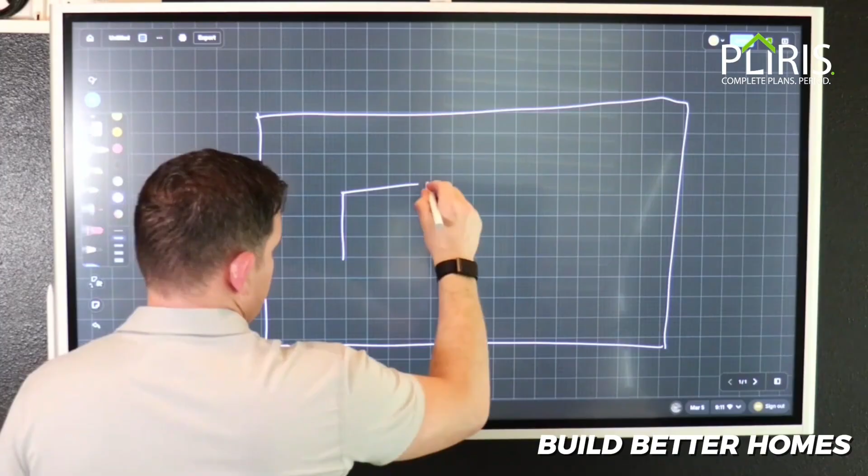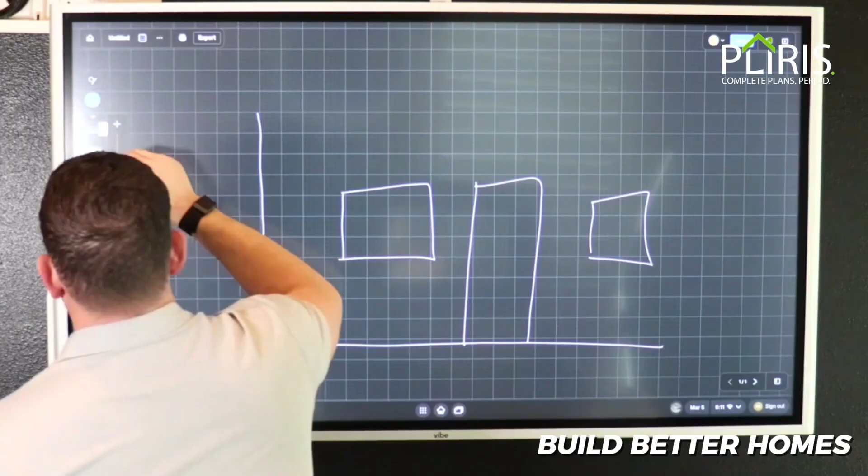A segmented shear wall considers a full height, unobstructed, with no penetration, so no windows, no doors, section of wall. Okay. So if I have a wall, and let's say just a common kind of front entry wall, I've got a window here, I've got a door here, and I've got a window on the other side. And I'm actually going to make this wall a little bigger to account for that. So the code is very simple in this. A segmented shear wall is a section of wall that has no penetrations in it that's also full height.

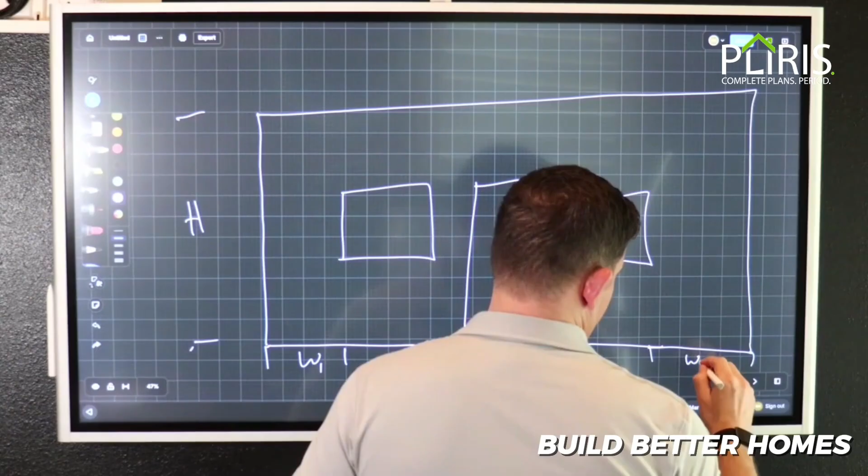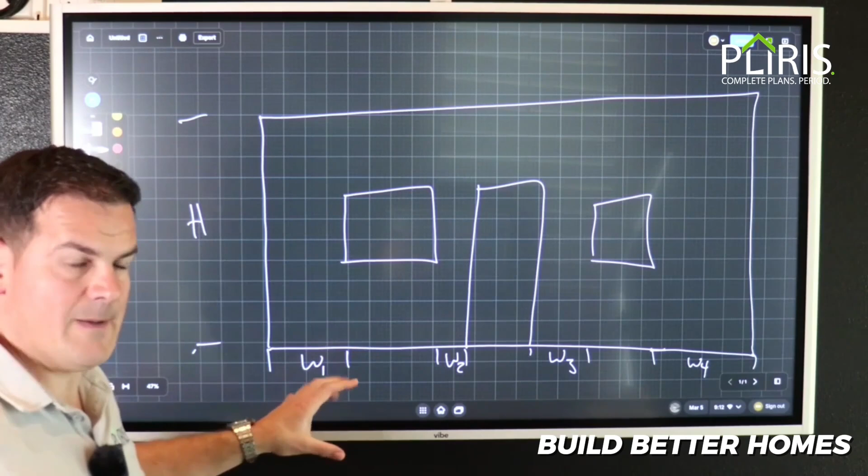So then there's also what are called height width ratios. So if I have my height here and say I've got this window width here and this is unobstructed. So this is 1, this is 2, I've got a width here. This is 3, and this is 4. So the height to width ratio is very simple. It's across the board. It's 2. No caveats, no reductions, no nothing. It's 2, which means very simply, if I have an 8-foot tall wall, I need a minimum 4-foot wide panel. And then I can take the complete shear of that in a segmented system.

But there's an exception to that, which says if I am over that ratio, I can still use that section of wall, but I have to take a reduction, which means that I can then go all the way up to a 3.5 ratio. So if I had a 9-foot tall wall, I can have less than a 3-foot wide section. I think it's 2'8" is what it works out to be. A 2'8" section on a 9-foot tall wall. And I can still use that section as a segmented shear wall, but I have to take reductions to its capacity because it's considered what's called a narrow shear wall.

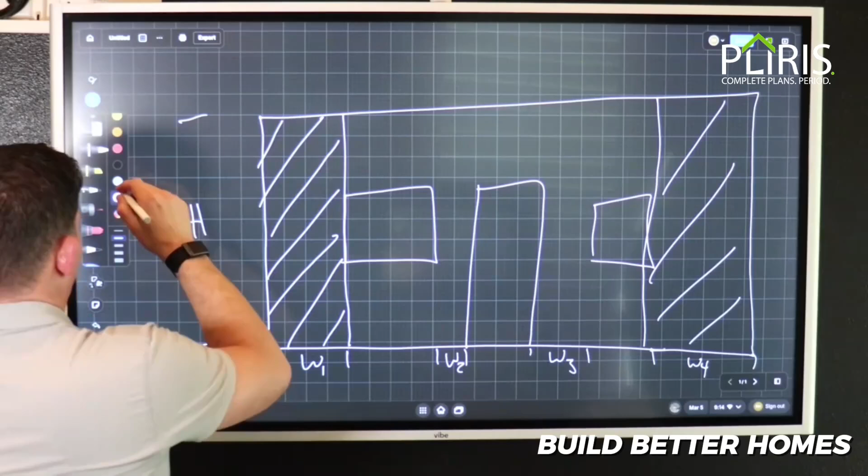But still, let's say my W2 and my W3 don't meet that ratio. So my section between the window and the door on both sides don't meet that ratio. That means all I can do is use this segment here, and then W4, the section on the right side of the window, I can use this segment here. Now, both of these are going to wind up with hold downs. So I'm going to have a hold down on both sides of this segment, and a hold down on both sides of this segment.

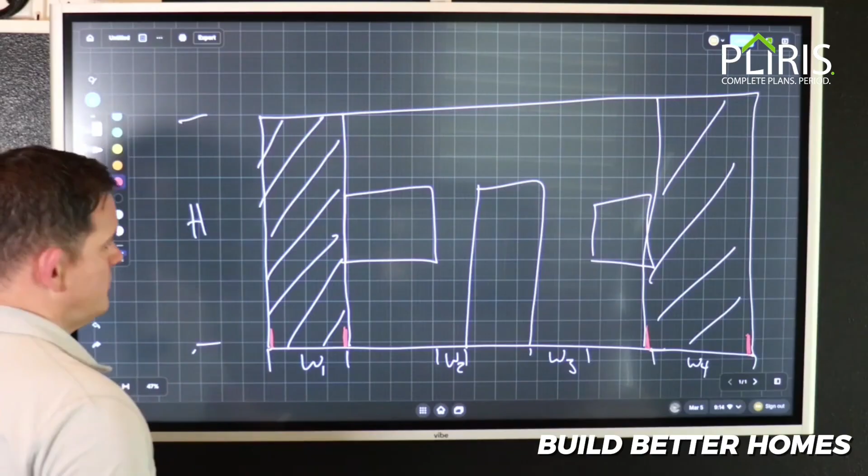What has happened now is I basically only have 2 segments of the wall that are usable as a shear wall. And each of those are acting independently. So I have to account for this situation of hold downs on either side. So I wind up with 4 hold downs on this wall section. Okay. That's segmented.

Now we're going to draw basically the same situation here, in which I have a standard entry wall. I've got a window. I've got a door. I've got another window. Keep making that one way too narrow, don't I? All right. So now we look at this, and I'm actually going to draw these windows a little differently.

So now we can look at this and go, okay, well, I have these windows and I have sections of wall above and below the window and adjacent to both sides of the window. Why can't I use those? And the fact of the matter is you can use those for lateral resistance. And that takes us from a segmented shear wall assembly to what's called a perforated shear wall assembly.

And so what a perforated shear wall assembly does is basically say, hey, you've got this penetration through the wall that takes away some of the shear capacity of this wall, but it doesn't make it zero. So why not just reduce it by a factor based on the ratio of that window opening to the actual area of the wall, or even the area of the door.

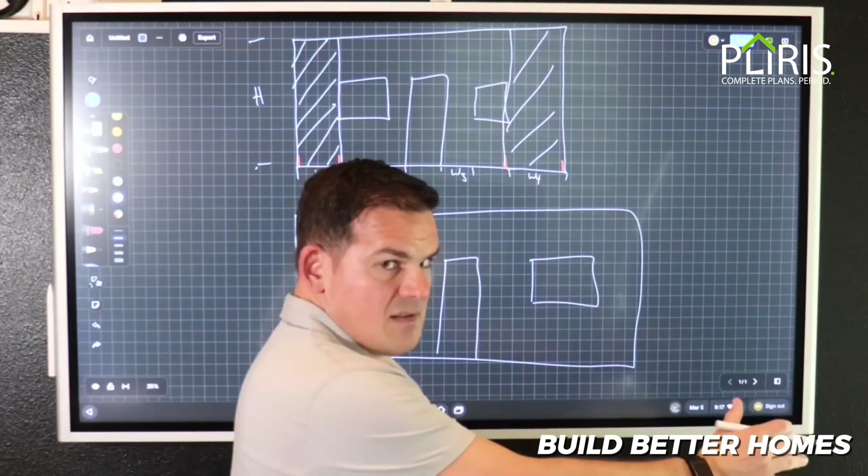So that's called a C0 factor, and it's a reduction factor that we account for. There are still limitations that we have to look at for the ratios, but we can say, hey, I've got a window, I've got a door, I've got this thing fully sheathed. This whole wall is fully sheathed. So what it allows us to do is say, okay, well, I may be able to resolve the load just here, just on one side of the door, and so I'm just encompassing a window, or if I needed the entire wall, I can account for the reduction factors for all of the openings as a relative ratio to the overall area of the wall. So now my shear wall becomes everything that I've sheathed. So it becomes all of this.

And so now, in the case of a lot of states where we already fully sheathe our walls to properly account for the siding and provide backing for the siding, we can now account for all that sheathing using a perforated shear wall. Now, I will say we work in states where stucco is very common and the builders are trying to save on plywood. And so we do what's called selective sheathing.

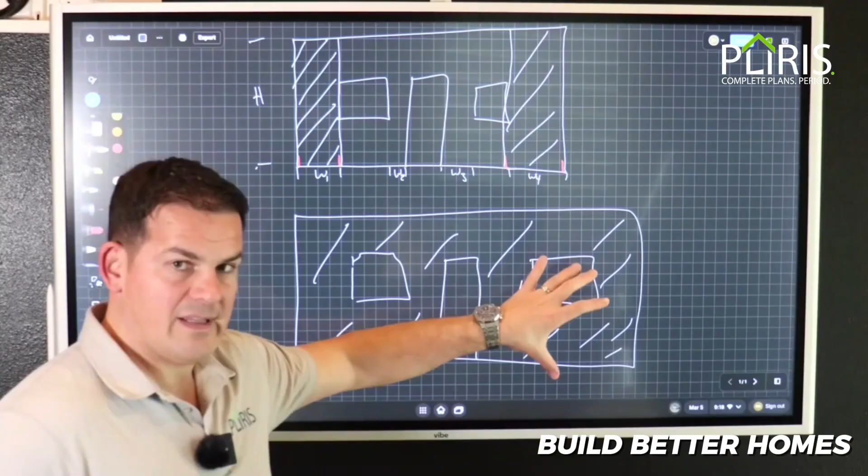And so in this case, we may look at this and go, well, hey, I don't need this whole wall sheathed in order to resolve the load. I can just, from the corner to say the door, sheathe that section. And then the rest of the area gets a fiber type board material that they put on instead of the more expensive plywood material. So then we would just be looking at sheathing this smaller section, resolving the load, even though we have a window, and then the rest of it can be the fiberboard. But regardless of what we wind up with, we can still account for the fact that we're putting in sheathing and we have some windows, but there's sheathing above and below it.

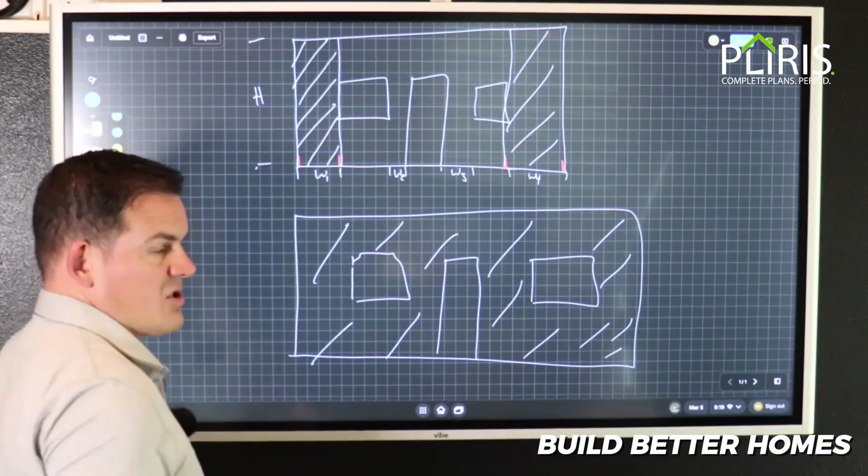And then what winds up happening is if we do that, instead of say the upper section where we've got multiple segmented shear walls, where each segmented shear wall has a hold down on either end, we now can wind up with just a hold down at the very end. So we just went from 4 hold downs to 2, which is great. Okay. So this is segmented. The upper one again is segmented.

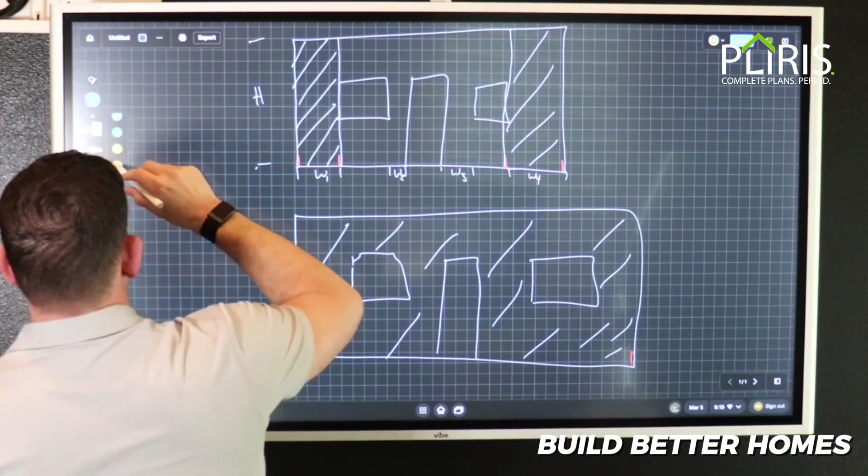Again, I'm learning my whiteboard. So appreciate your patience as I learn how to use this really cool tool. And I hope it's beneficial.

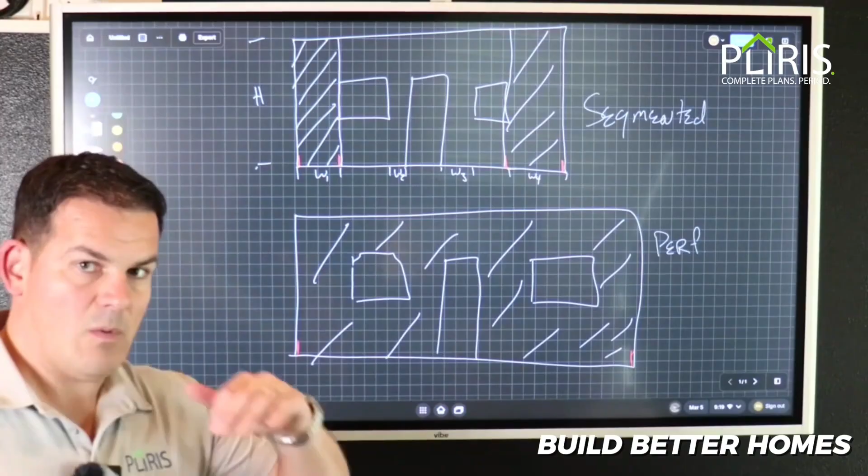So this is segmented. This is perforated. We'll just abbreviate that. Okay. Now there is a third prescriptive shear wall that we can engineer with. And I'll go back to what I mean by prescriptive. So there's a third prescriptive shear wall that we can use. And that third prescriptive shear wall is what's called a force transfer around opening, or FTAO.

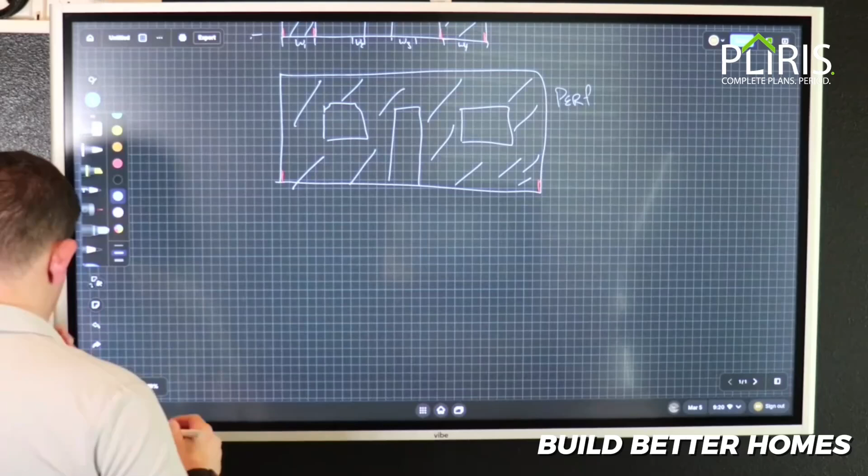So where this comes into the discussion is, let's say we have a wall. We've got windows and a door. We got another window. But you'll see I've drawn these windows pretty large. So the segments adjacent to them are pretty small. And I did this for a reason, because this also becomes common in a front entry condition, or in an area where now we're seeing jurisdictions actually requiring a percentage of openings based on the front of the building. They're pushing for more window openings to increase the aesthetic, not just be a four-sided box with just a small front window, an egress window in each bedroom, and a window in the bathrooms. They're trying to encourage the use of more openings.

So what we wind up with, unfortunately, these segments may be too narrow to meet the ratio. So that 2 or 3.5 ratio, we just can't get to it. And so this is a great tool that we use in that situation. We also use it when the forces are so high on a wall that it's pushing us into a hold down that is either A, significantly more expensive, or B, cannot be retrofitted.

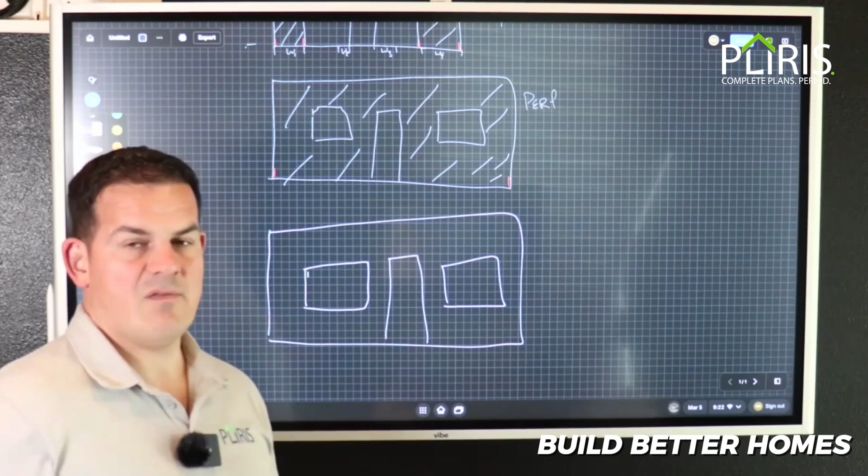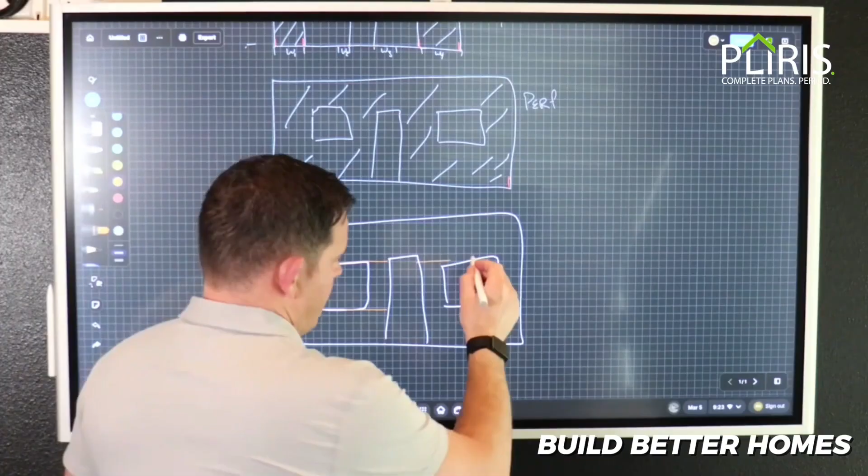Okay. So again, ratios or just the tension forces are so high. And so what an FTAO is, and you've probably seen it driving around job sites, especially on multi-story apartment complexes, we actually put a strap across the top and the bottom of the window. Okay. We have this strap going across it, and that functions as a drag or a collector.

So for the typical wall, the top plate and the bottom plate function as that, just under natural construction conditions. But what we found through testing and the development of this is by putting that strapping and providing blocking in the back, it serves the same purpose.

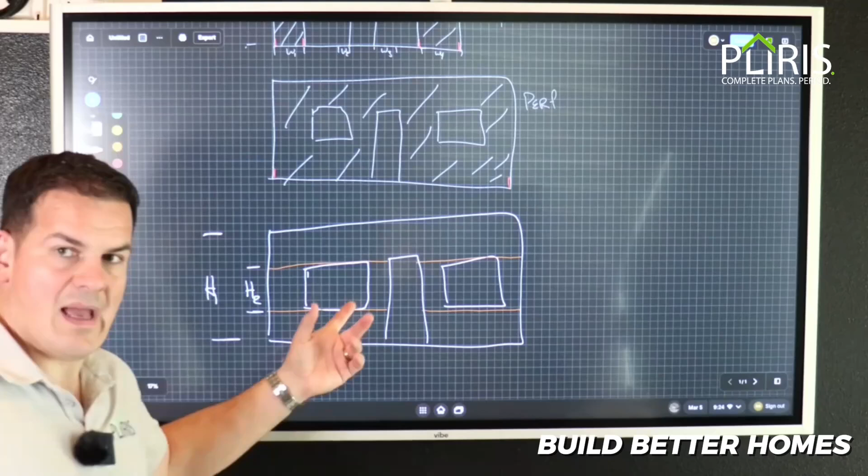And so now what winds up happening is, instead of having to take the full height of the wall in consideration for our ratio, we actually take the height between the straps, which is basically just the height of the window. So now, let's say I've got a 9-foot wall and I put in a 5-foot tall window. Now for me to meet that ratio, my height that I'm considering is now 5 feet instead of 9 feet. So for me to meet that 2 or 3.5 ratio, I can do that with a much narrower wall section.

Okay. And so by doing this, it does a few things. So one, it brings our height down in our ratio, which is great, because let's say we were at 3.5. Now I put those straps in and say it gets me under that 2 ratio. Now I don't have to take any reductions on my shear wall.

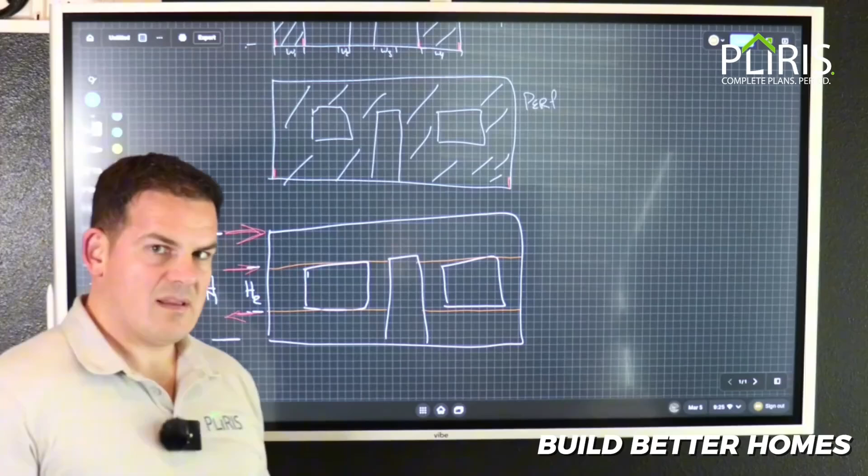Okay. It also shrinks my height down that I have to account for in the tension, what's called the tension compression couple. So if I have my forces being pushed up here initially at the top plate, I now can actually account for them pushing right here at my strap, because this is now functioning as a collector. Okay. And then I'm actually looking at them being resolved based on the height of my window, not the height of my wall.

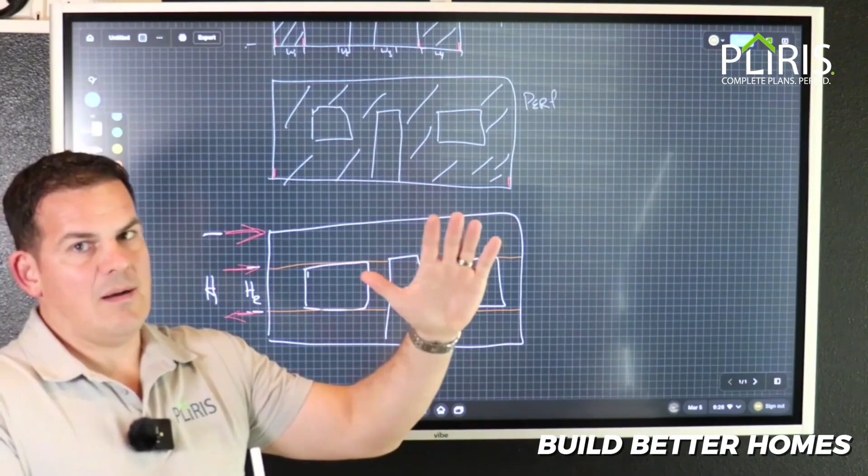So in doing that, it also reduces the tension force that's on there, because when I'm pushing on something taller, and we can think of this as the leverage equation, right? A consideration of leverage. If I'm pushing on something, let's say a box, and I'm able to get way, way high up on that box, it takes less force for me to push that box over.

If I'm pushing at the top of a box and I'm trying to resist it at the bottom with a point, okay, the further away I get from that point, the more leverage I have. So the more force that base connection requires in order to resist that load, okay? So if I'm going like this, the higher up that force is, the more resistance I need on this side. If the force is pushing way up here, the more resistance I need on this side, okay?

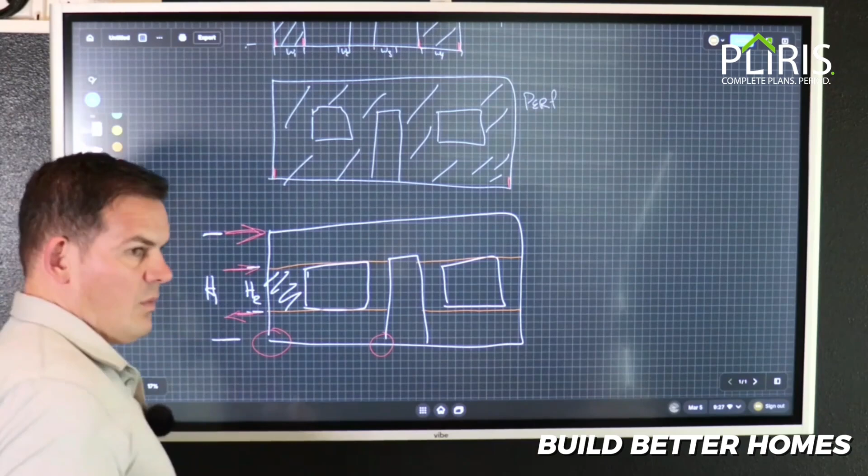So by shrinking that down, I've reduced my tension force that I have to account for at these bottom points. Okay. Now the shear does increase in these sections, but if we can resolve that shear with just standard nailing and sheathing, that's conventional construction. That's not adding any cost to the real project, right? Another stick of nails or another coil of nails on a sheathing project is not a significant amount of expense.

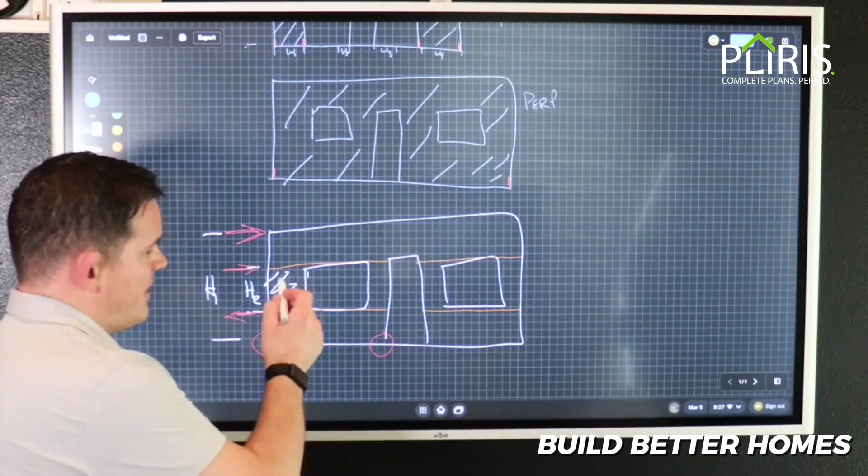But when we have extremely large embeds, custom made embeds sometimes, and a high tensile force to resolve, and beefing up a foundation and doing all those things, that can add a significant amount of expense. Not to mention the coil strapping we're speccing typically comes in 100, 150, 250 foot rolls that, again, are not a very high cost per foot.

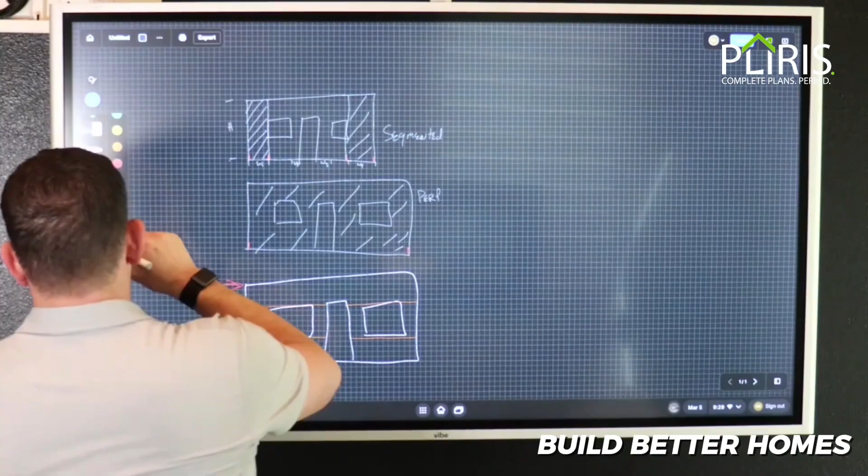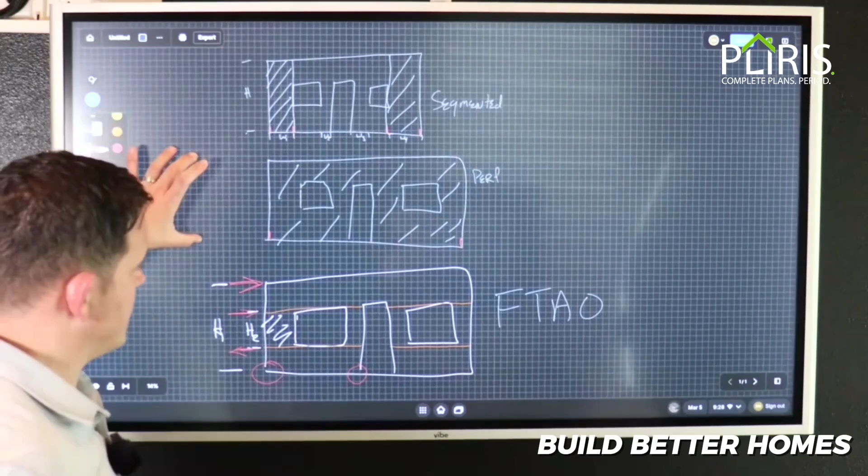So this is a great tool that honestly, I see a lot of engineers not using. Most of what we see coming from engineers for general residential construction is a massive use of segmented only with maybe some perforated mixed in. Okay. So again, this is the FTAO and it is a great additional tool that can and should be used by engineers. Okay.

So in conventional wood construction, these are your three prescriptive, in that we have a code that says, hey, if you have these conditions, you analyze it with these factors, this is what your capacities are, right?

And this is how much force you can resist, like per lineal foot or whatever the factors may be. So these are your three most common prescriptive wood construction shear resistance methods. Okay. There is a fourth, using, again, conventional wood construction, that is performance-based.

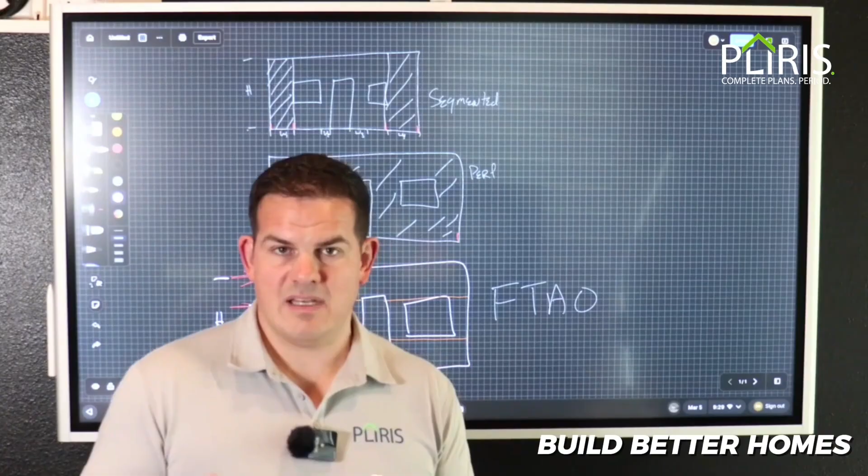And what I mean by performance-based, it is something that there really isn't the engineering principles to back it, to support it. So they've done a ton of lab testing on it. And that lab testing has resulted in us having capacities for these wall sections that we can look at and determine as engineers. And we're basically given a table which says, if you build it like this, this is how much capacity you get. Okay.

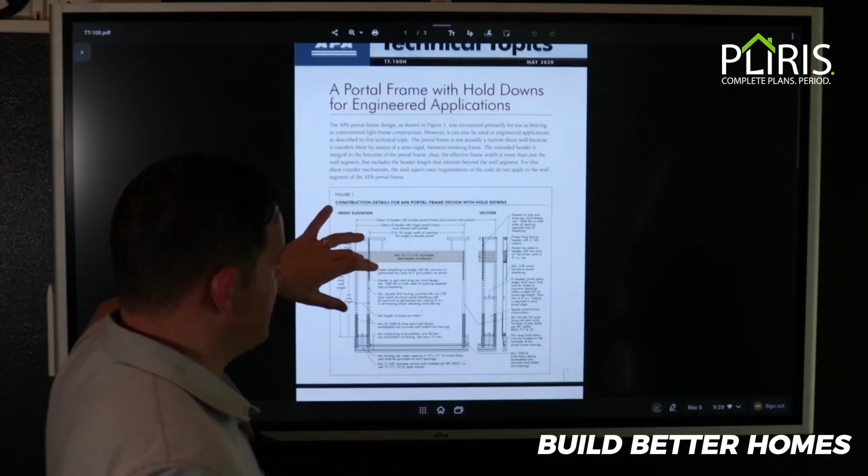And that would be what's called a portal frame. Okay. So here's a great diagram from the portal frame. The APA has done a ton of testing on the portal frame.

Man, I keep on getting blacked out here, don't I? All right. So let me zoom this in here, make that bigger.

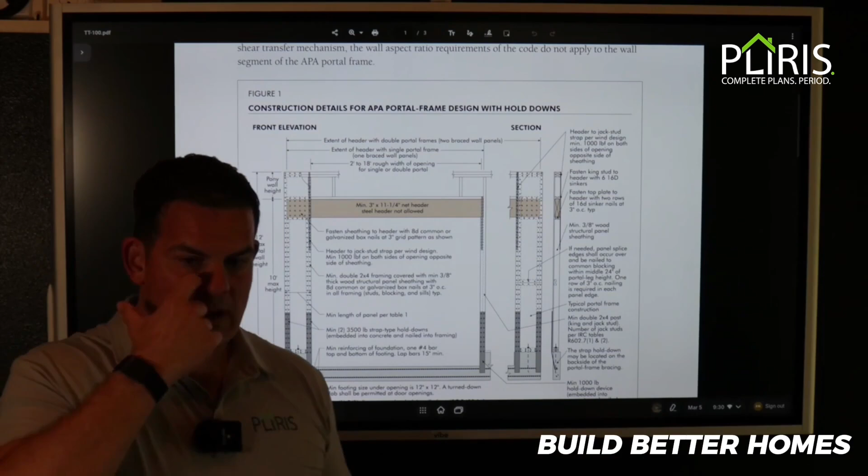Okay. So the APA has done a ton of testing on this portal frame system. And what they've given us is this envelope that we have to build it within. This portal frame has been adopted by the IRC. You can find it in the prescriptive path methods in the IRC. There's some other variations to it that the IRC, International Residential Code, has provided for us for reference. But vastly across the board, we're working in 30 states now. This is what everybody uses.

Okay. So the portal frame initially was developed and put into use for around garage door openings. And that's still what it's used predominantly for, is garage door openings. And it allows us to have these narrow wall segments to then allow for a large opening for these garage doors. And then you can work with it there. We have used it in other situations where we had no other method.

We've used it in like some townhomes where they're a narrow build in that 18 foot to say 26 foot envelope. And we've used them around the rear sliders just because there was no other real option, or there is another option, but it's much more expensive because it's a pre-manufactured system versus something that their framers and their concrete guys know how to build regularly.

So this is something you guys can fully download. It's the APA TT100. And like I said, it's been around for a long time, and it's very simplistic for the most part, but basically key points of it: max height is 10 feet, and that's from your top of the foundation to the top of your header. That's your max height because that's where the load is actually being resolved.